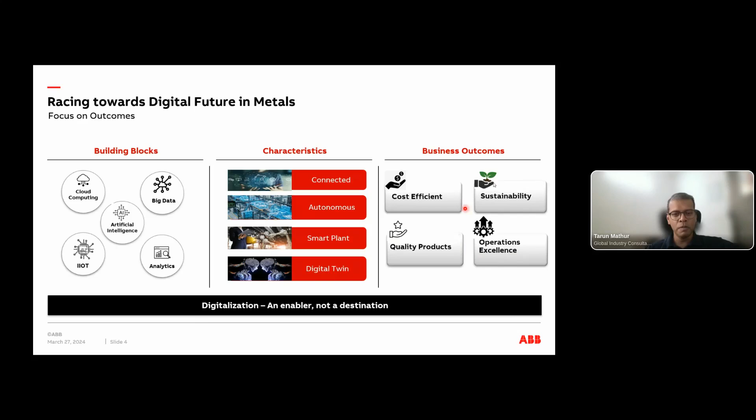In my experience, generally we lose sight, so let's keep our eyes on the prize, the business outcomes on the right side that you see. And with that note, let's look at the next problem: how?

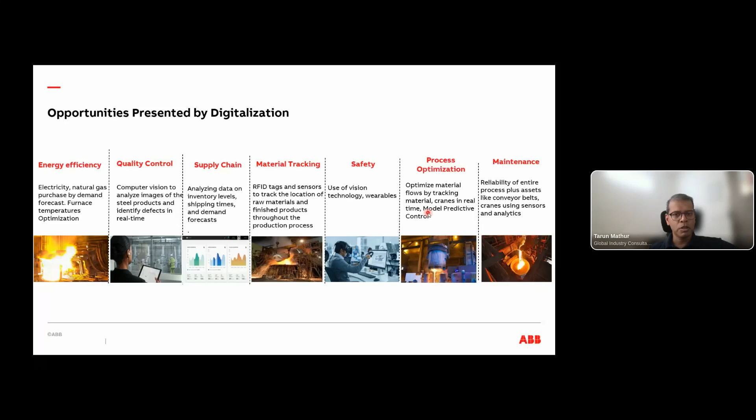Good. Then coming and drilling down to what ABB has to offer. So ABB, as you know, we work more closely to manufacturing, more on the manufacturing part of digital, more operations and maintenance related.

We divide our portfolio into 5 pillars. At the top is asset performance, centered around the asset itself, its performance, downtime, and how we can avoid or reduce it. Process performance and operations are quite similar, but process performance relates more to advanced process control, kind of level 2 on the automation layer, where we improve with the use of data and models. Operations excellence, on the other hand, sits in the traditional mindset of level 3, where MES, scheduling, and optimization algorithms sit.

Sustainability, no doubt, is one important opportunity to improve, and we have some solutions for that as well. And last but not least, connected workforce—it's an emerging portfolio for us. Here, instead of the process, the workforce or the operator is in focus. Typically this includes either the safety aspects of the people or reducing their workload, like by digitizing logbooks, digitizing maintenance workarounds, and so on.

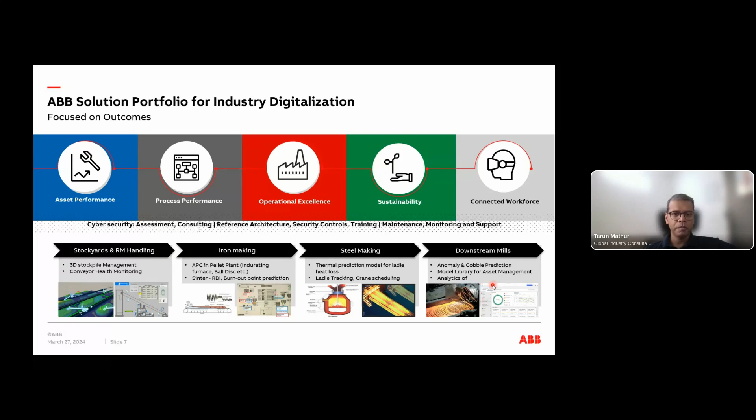So that was a short overview from me about the opportunities presented by digital, but digital is a large aspect, so everyone uses its own lens to visualize it. It would be good for us if you take this poll and share your views—what opportunities do you see in your day-to-day work for your organization or the plant you work at? It would be good to see whether it resonates with what I presented or not. Please go to slido.com, or use your phone camera to scan the QR code and put your input there.

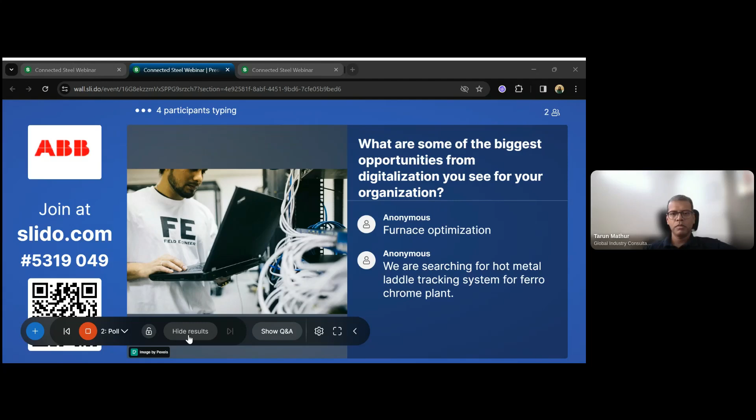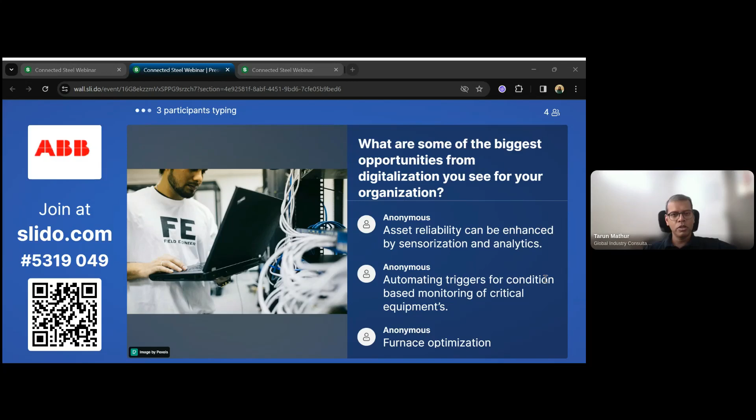Furnace optimization—I assume it's about reheat furnaces, which are also about energy usage. Then we have automatic triggers for condition-based monitoring from critical equipment—definitely, I think this is one of the most popular fields. Asset reliability, using sensorization. Hot metal temperature—yes, I think you nailed it. I think in ladle tracking and other projects, especially in the melt shop or upstream, temperature is key, right? Temperature and chemistry at each process, so if we can either monitor it directly or estimate it, that helps the operations.

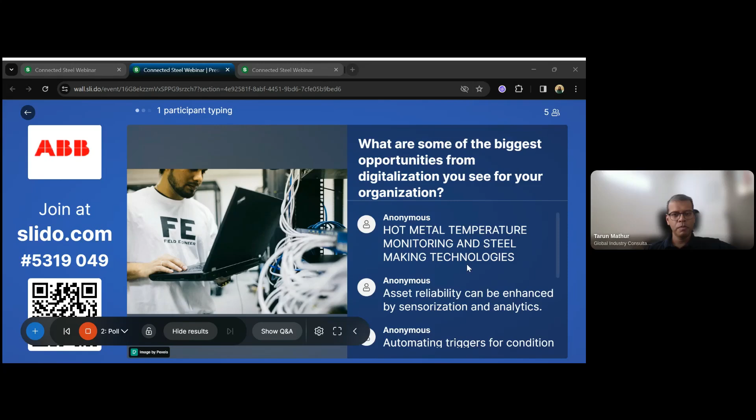Good, some nice comments. Maybe just a few more seconds, Shalaka, then we can shift back. Okay, good. Thanks for participating, I think it gives a view about the opportunities that you see. Good, then let me move to the next slide.

I will present one case study on advanced process control, or APC—some of you from an automation or control background might know it as model predictive control. It's one of the proven and established technologies to optimize complex processes, especially continuous processes. That's why we see only a few use cases in the metals industry, but this is a very mature technology in oil and gas, cement, and pulp and paper. It works by modeling the process behavior, predicting it, and using that model to provide closed-loop set point changes to the automation layer. That's very important to note—unlike many other digital solutions, this technology works in closed loop for improving efficiency and quality.

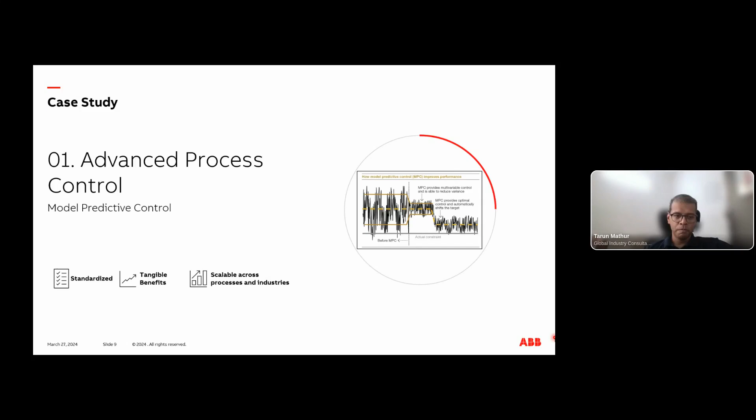So as I already said, it's a standard approach, and that's what makes it scalable. ABB has a standard platform, and you can fit any process on that. We have done that even for different industries, and even in metals. I would show you a lot of processes we have covered using the same platform, same framework.

So it is that powerful technique in control theory. It works on top of PID or automation layer, and the output of this is set point changes to PIDs. As I already mentioned, it works in closed loop control. I'm highlighting this because the benefits are tangible, since it does not rely on human intervention to upload or download the results to make the potential realize.

So in simple terms, it sits on top of automation. It has a data model at heart, so it's fair to say it has a mind of its own. It knows the process dynamics, which are modeled and kept at this layer. So you can call it a digital twin as well for control.

We have to configure whether we want to run it for maximizing the throughput or minimum energy - that we can do, and that's actually also very key. We can also define the constraints on your key operating variables so they don't go out of bounds. So it can run in closed loop without the fear of the process going unstable. It's that proven technology.

It's not so common in the metals industry, but you see some of the use cases we have mentioned on the left, and many of them we have already delivered. You will see some examples from me and also from our guest speaker as well. Let me show an example from a pellet plant, because you see a lot of opportunity there, and not just pellet, in a sinter plant as well.

So this is a typical pellet plant, and a few years back, we started by analyzing what are typical problems that can potentially be addressed by APC. We look for typical process variabilities - like ore grinding at the top in the beginning, so we have to control the variability in grinding quality.

Then there is a balling disc to make the green pellets, so we have to handle or remove or reduce the green pellet size variability, reducing rejects and increasing throughput. Then if you come to the pelletizing machine or indurating machine, it's about temperature variations which result in pellet quality variations, and also limit how much you can increase throughput.

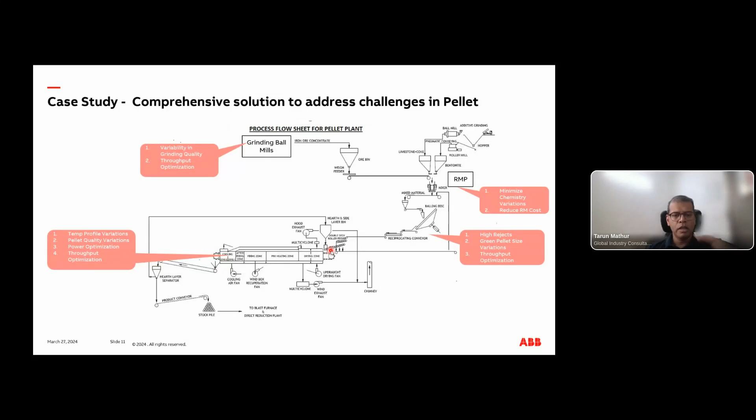So starting from grinding to indurating, we have deployed this, and many of them at JSW itself, which they will present. So I will not spend much time here, but I will just take you through a couple of use cases, how it is typically used or how it is typically developed.

So this is a grinding mill example, like a ball mill. Typically you have to look for measured signals and divide them into control variables that we want to control, that you see here in dark blue, or maybe we want to maximize. If we maximize throughput, we have to find a measured signal that signifies that - flow rate or speed - which signifies the throughput, and then we can put it into the maximization zone of the APC.

Then there are manipulated variables, meaning the variables whose set points can be changed to control. Let me make a point here - when it changes the set points, it doesn't make sudden changes. It always makes incremental changes to always be in control, right?

And then there can be other parameters like quality. There can be measured disturbances that we cannot control, but we can use them as feed forward, predictive variables. Once we identify it, in the framework of APC, we collect the data, make the model, and then in real time it predicts and optimizes and comes up with the right set points. So that's how it works, for the grinding mill, and in similar fashion.

Next one is very fascinating, very interesting example - that is for the balling disc, which feeds the green pellets to the indurating machine. Generally pellet size measurement is not continuous, there is no sensor there. And if there are undersized or oversized pellets, they are either rejected or recycled, and that is not good, because then the same material goes over, you increase your specific energy consumption, and it can also become the bottleneck for increasing the throughput.

Here the controlled variable is pellet size, and the manipulated variable is disk speed. There can be more, like tilt angle, water addition, but that depends on your control philosophy, whether you have them as measured and controllable or not. But in this case, we have one problem: we do not have the pellet size measurement.

Remember, everything has to be a measured signal. So if we don't have the pellet size measured, we resort to computer vision image analysis to detect the pellet size. If you have multiple balling discs, we have one camera for each disk measuring the pellet size continuously in real time. It gives the size distribution as an output to APC, which then changes the set point of, say, balling disk speed.

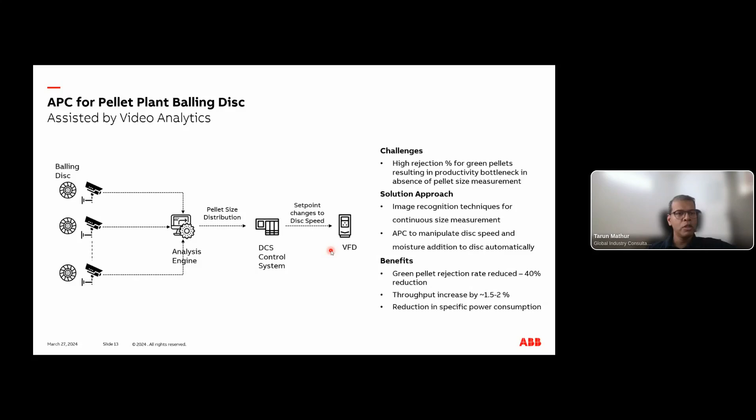This typically results in a lot of reduction in reject. And if the downstream process, the indurating machine, allows, you can also increase throughput. It also reduces the specific power consumption, because you're not recycling again and again the same material to produce the same throughput. So this is a very interesting project which we have done quite recently.

Then there's another project on the indurating furnace as well, with the same concept. Here the control variable is the temperature profile, the burn-through temperature, because it's very important to keep the temperature profile pellets are exposed to, so that quality is in check, like CCS, tumbling index. It can also be used to reduce the ID fan power you see at the bottom. The fan power consumption can also be optimized with this.

So, similar philosophy: we use manipulated variables like the fuel flow through the burners in different zones of the indurating machine, and the results we have seen are very promising. First it tries reducing the variation of the temperature profile and ensures that the burn-through temperature is achieved. That itself will help the pellets reach the right temperature, which improves quality.

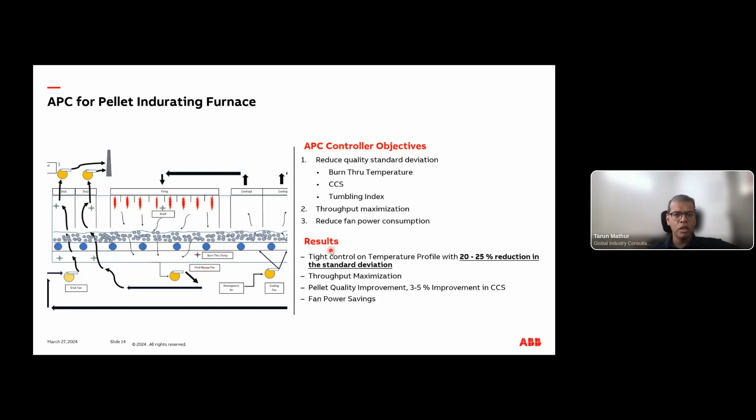So these are some of the examples, multiple examples. We have also implemented APC in the ore dryer, for example. So I would say this is one of the very promising technologies, and with the advent of this mathematical modeling, we can use advanced process control more and more in metals, not just in pellet plants. It can be in sinter plants, in your boilers if you have a captive power plant, and so on.

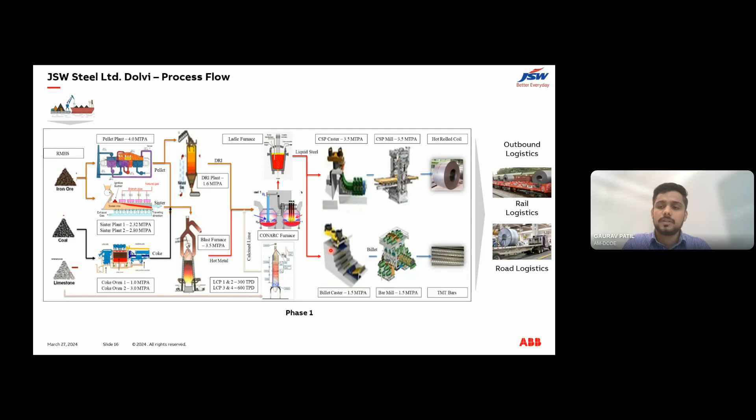In Dolvi, we incepted the digital transformation in 2017-18. The background behind this is that initially there was a lot of manual intervention in the processes, and there was a lot of scope for improvement as well as cost saving. In 2017, we started this digital transformation journey with the help of experts.

After that we continuously introduced new technologies in Dolvi and JSW, deploying it horizontally across the group. A major role in the digital transformation success of JSW is employee engagement. To ensure high employee engagement, we continuously conduct ideation workshops, participation in various competitions, different training programs, know-how sharing sessions, and interplant discussions with the Vijayanagar team and Salem team, as well as quizzes. There is also a platform for all employees where they can learn themselves - a self-learning platform called the digital central platform.

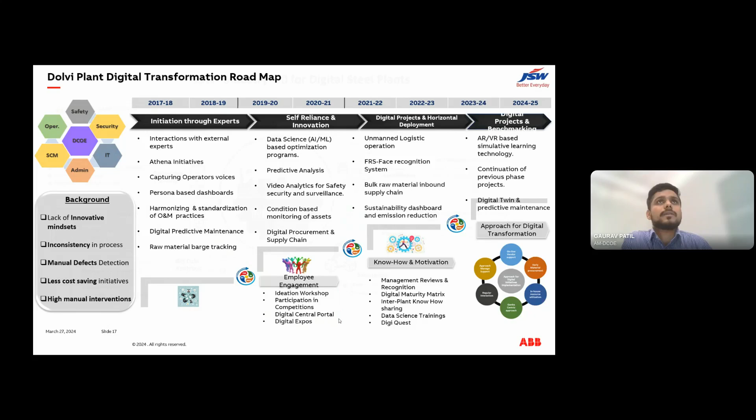In JSW, we focused on various technology domains including artificial intelligence, GPS, IoT, big data analytics, simulation, machine learning, process automation, and cloud computing. We have implemented different initiatives considering these technologies, and they have really helped in our digital transformation journey. I am going to present a few shining cases today which we have implemented in JSW.

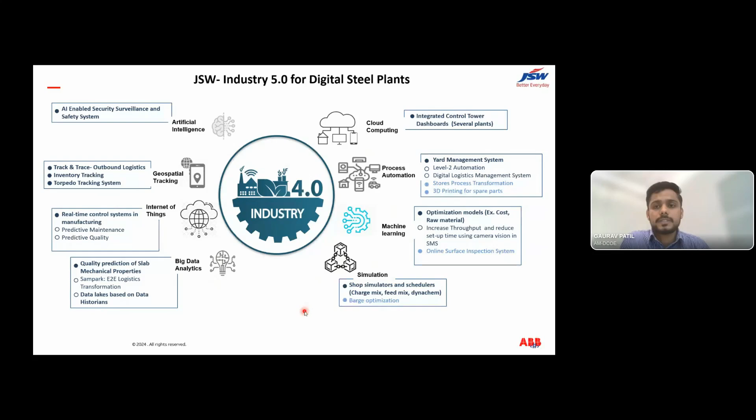So the first case, which Tarun has already mentioned, is APC for the balling discs. The problem statement for this initiative was that initially there was a high rejection rate in the pellet plant.

In the pellet plant, there is a balling disk which generates ball-sized pellets fed to the induration furnace. Before feeding it to the induration furnace, there is a screening for pellets between 8mm to 16mm, and we were getting a high rejection rate in the screening. So we implemented this initiative with the help of ABB in JSW Dolvi Pellet Plant 1, where we had a baseline of 19% rejection rate, and we took the target to reduce rejection to 10%.

This is the typical architecture for this APC - we installed cameras for each balling disc, and this video feed is fed to the Cerebra server. The server gives the real-time size distribution of the pellets, and according to this real-time data, we control the speed of the balling discs.

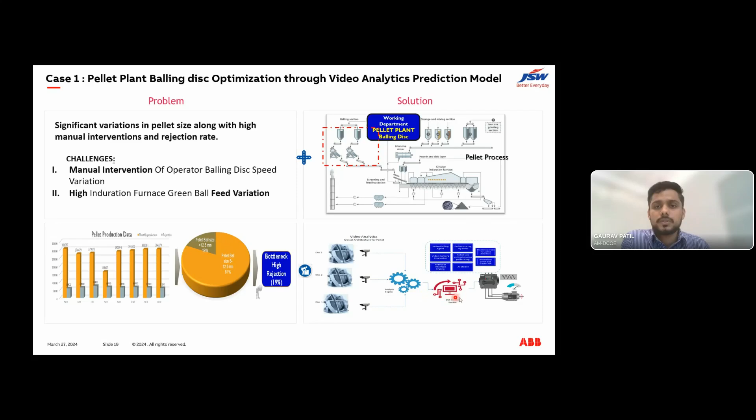This is the solution architecture I mentioned earlier - we installed cameras and this camera feed is fed to the server, which controls the balling disc speed via VFD. We are also controlling moisture, so that we get the desired size distribution of the pellets.

The results of this initiative were really incredible - we reduced the rejection rate from 19% to 6%, which is even lower than the target we initially considered. Due to this reduction in rejection rate, we also saw an increase in the production rate. This is the initiative we implemented with the help of ABB in Pellet Plant 1.

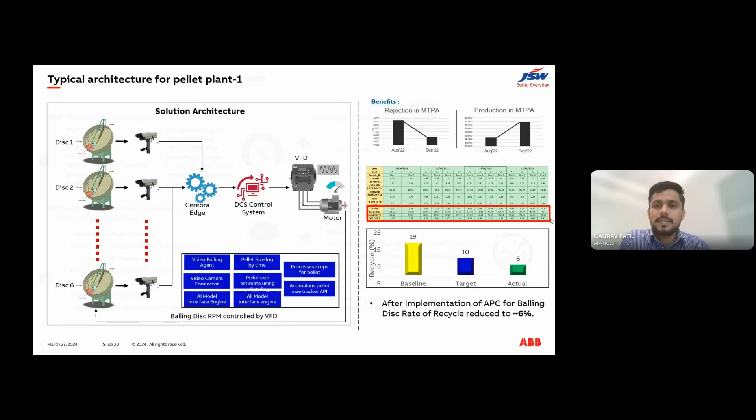The next shining case we implemented is in SMS1. The problem statement behind this initiative is that in the Con-arc shell there was a lot of manual decision making for operations, and there was no proper planning.

There was no proper planning for production, and no proper planning for hot metal mixing, due to less visibility of the torpedo and less visibility about the tap out, and there was no accounting for delays and breakdowns.

So we implemented this initiative so that we get an optimized plan for the next 2 hours. We get visibility of the torpedo - how much hot metal is on wheel, how much hot metal is in the blast furnace, and how much hot metal will be available for the next 2 hours. This allows us to optimize the 4 Con-arc shells and optimize production using this production plan.

Due to this, we got synchronized upstream and downstream production, resulting in increased liquid metal production. For this initiative, we are using geofencing to track the torpedo, data analytics, and linear programming to get data from different sources, optimize it, and get the optimized result for the next 2 hours.

What will be the best plan for the next 2 hours, so that we can get optimized use of this converter shell. We have also provided persona-based dashboards for the HODs, as well as the operator and blast furnace operator. So this is the basic overview of this initiative.

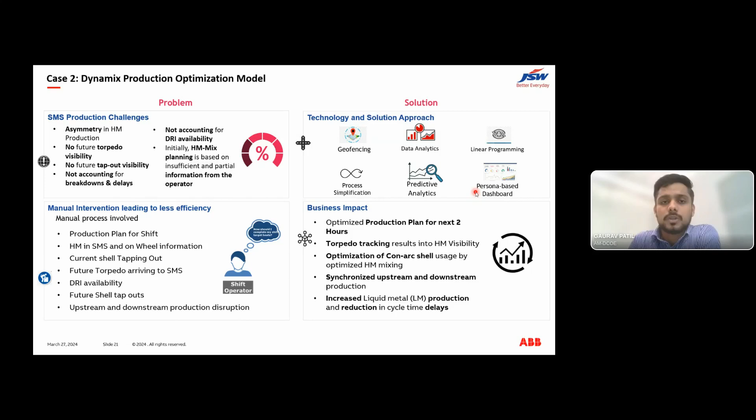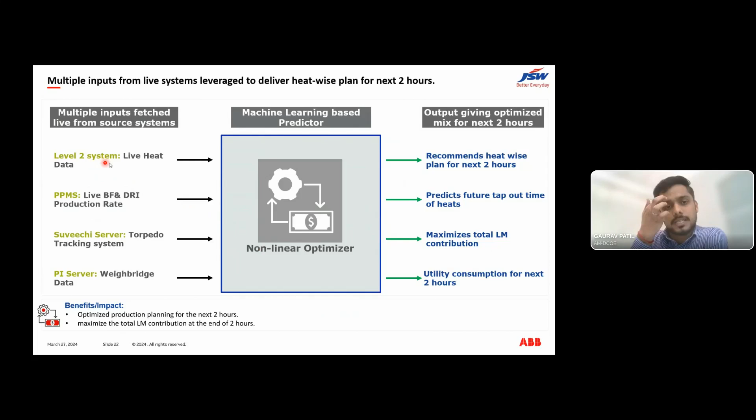For this initiative, we are getting live heat data from the level 2 system of SMS, as well as blast furnace production rate and DRI production rate. We get this from the PPMS system. We have implemented a separate system for torpedo tracking, which is a Suveechi server, and we get the weighment of the torpedo from the PI server.

This data is fed to the nonlinear optimizer, which gives us the next 2 hours plan for production, the next 2 hours plan for each converter shell, and the possible consumption of utilities for the next 2 hours.

It has a huge impact on production improvement in SMS1. It is really giving an optimized production plan, and it has resulted in maximizing liquid metal production.

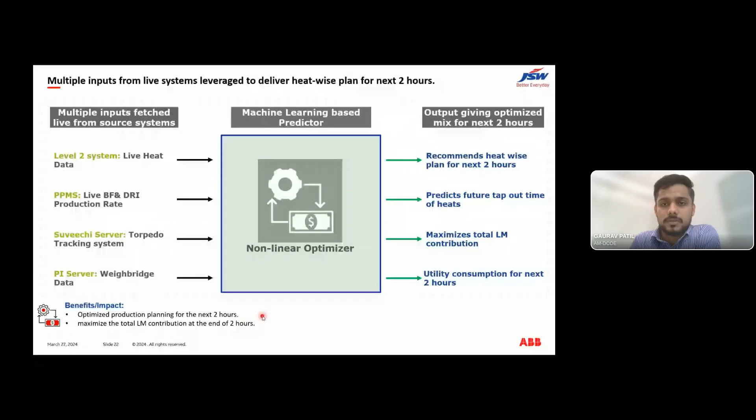The next shining case is setup time reduction using a vision system in SMS1. Initially, there was no visibility for micro-level activities during setup time, and no decision making was possible since no data was available, so we were losing data and missing the scope for improvement.

So we installed cameras to track all the micro activities, which analyze each activity, and we get a log for each activity showing how much time it consumes.

We created a system to get logs for delays in each activity. In case there is a continuous delay for a specific activity, it gets escalated to the HODs, who conduct brainstorming sessions and discussions with the operators about why the delay is occurring continuously.

Due to this, we are able to reduce the setup time. Initially we took a target of 12 minutes from the baseline of 14.6 minutes, and currently we are getting around 11.4 minutes setup time.

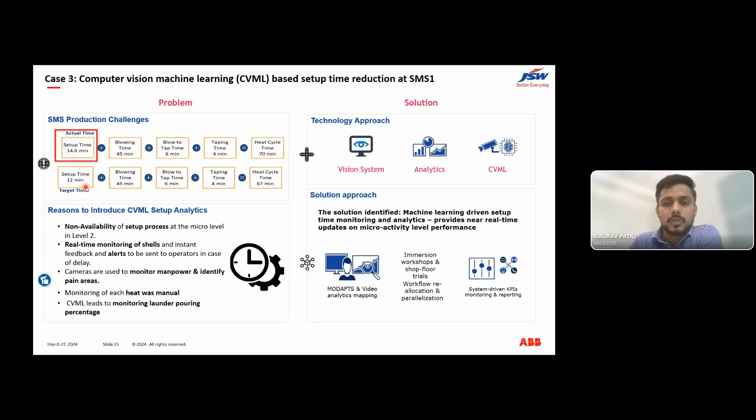In this initiative, we track micro-level activities during setup time: top lance positioning, hot metal pouring, end brick cleaning, launder insertion, furnace leveling, and hot metal positioning. These are the micro-level activities we track using a CVML system.

This has resulted in reducing the setup time to 11.4 minutes, and the total overall cycle time has been reduced from 70 minutes to 67 minutes. It has resulted in improvement in production in SMS1 as well.

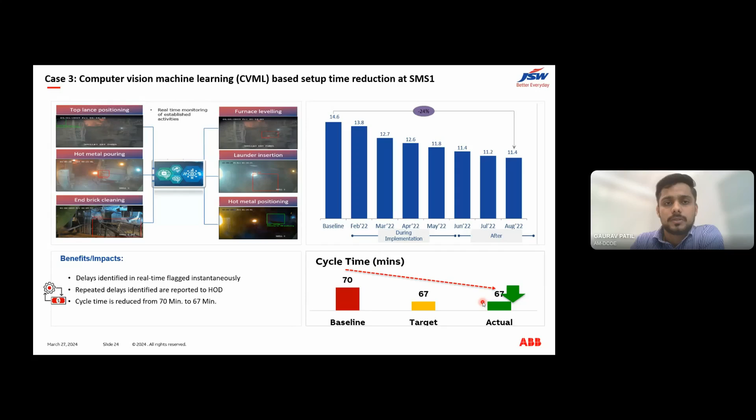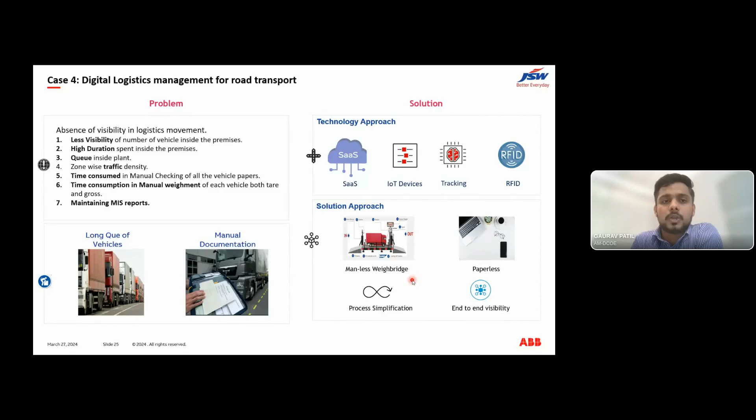In this initiative, we are tracking all inbound trucks, interplant movement of trucks, as well as outbound trucks. In outbound, currently we are live with the outbound operation in Sampark, and we are tracking coils, pig iron, and pellets, as well as billets and TMT bar outbound operation.

This project was divided into 4 modules. First one is a parking yard management system. Whenever a truck arrives in the JSW premises, tracking starts from the parking yard. Then we get the pre-intimation of the truck arrival in the parking yard, so that our planner, which is not a manual operation now but automatic, assigns the DO to this truck to carry the coil. Then the truck enters the plant, and all operations are tracked using this digital solution.

So the benefit we have achieved from this initiative is a high reduction in TAT, and there is no scope for error now. This is the initiative in logistics digitalization we have implemented.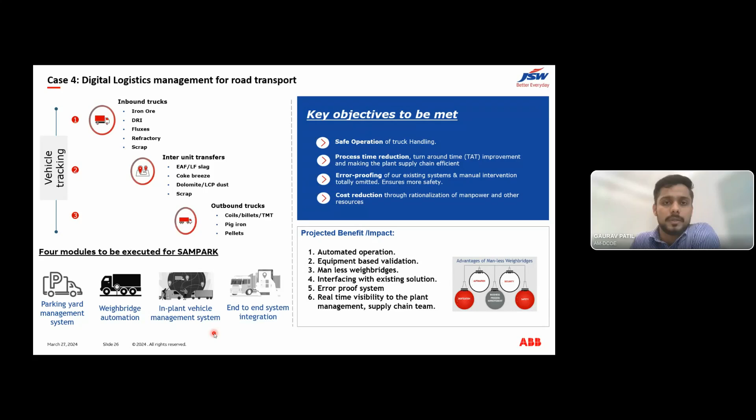In JSW, we prioritize safety, and there are a lot of digital initiatives we have implemented to improve safety in the plant. As Tarun has already mentioned, the connected workforce solution - we are also in the POC stage of connected workforce solution in Dolvi. Then there is a laser scanner for the LF ladle, a PPE violation detection system which is CVML based, and a flare stack thermal imaging system. These are the systems we have implemented to improve the safety of the workforce and safety at the workplace.

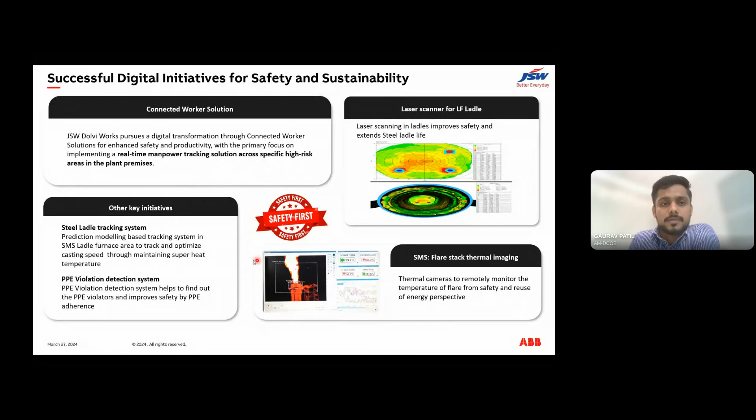Thank you, Gaurav. I think this is very interesting, and I'm sure it will motivate others, because what I've seen in the past working with JSW, you have a thriving ecosystem of innovation with suppliers like ABB and others. Some of the solutions are very unique, using different building blocks I was explaining earlier, like IoT sensors, analytics, and optimization techniques. It's always good to see you had a business target in mind when you started the initiatives, whether reduction of setup time or reduction of rejects. So these are shining examples of how digital technologies are utilized to achieve business outcomes. Thanks for sharing with us, Gaurav.

Thank you very much. So I will continue from here. I will give a few more use cases for our audience here.

Let me move to another project that ABB did for improving the efficiency of melt shops, steel making shops. In this slide, I've mentioned the typical challenges you would recognize.

Melt shops are characterized by a lot of movement - you would see a lot of material movement in ladles, crane movement, and lots of manual operations. So tracking of material along with the ladles is important to improve the overall efficiency of the steel making shop, because what is essential is to have the right temperatures and chemistry at the end of each process, so the melt shop can produce the right quality of steel with the highest production rate.

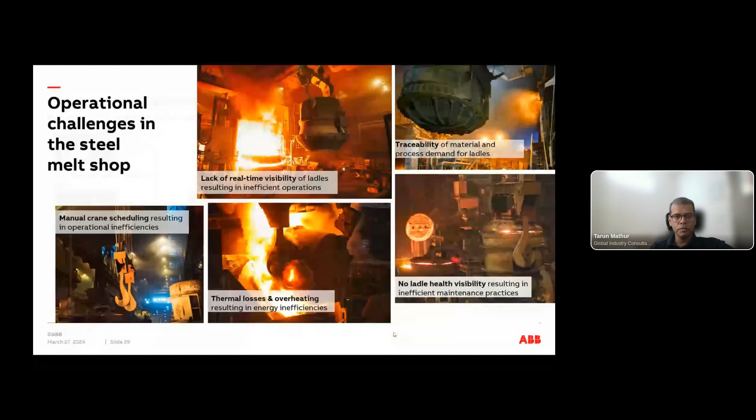In the next slide, I've tried to show the challenges seen in the last slide. On the left, due to lack of real-time visibility and insufficient or no thermal history, thermal loss prediction becomes very challenging. And why is that important?

Because there is a very important KPI measured by the operations team in a melt shop: superheat compliance. That's at the center here, which simply means how many percentage of heats reach the caster at the right average superheat temperature - for any grade of steel, that's its liquidus temperature plus say 17 to 20 degrees, at which the caster can produce at the highest productivity.

Because at higher temperatures one has to slow down the caster, and low temperatures might also get high chances of rejection of the entire heat or batch of material. So avoiding caster slowdowns and impact on melt shop productivity is one objective. It also impacts the energy input in the LF, because if operators are overheating earlier, that can be reduced.

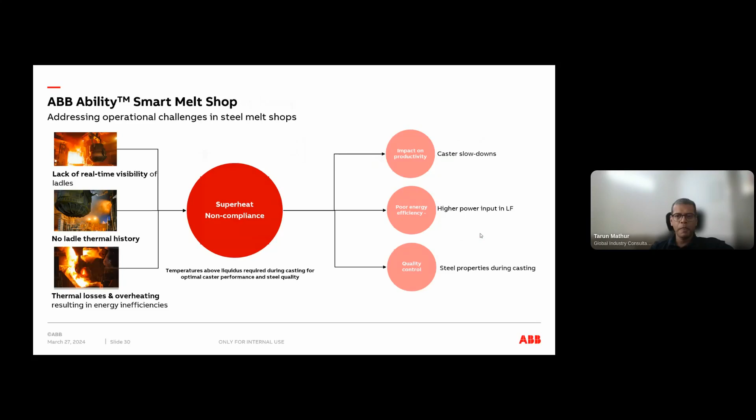We don't just have the thermal model. We have three different modules here. First is the ladle tracking - someone in the chat box was already asking about it. Ladle tracking is very important to have the complete ladle thermal history, and this is a very hardware driven solution.

We don't use RFID here. Of course we can use that, but it poses some challenges due to the high temperatures. So we use radar for crane positioning, and some other sensors, but the idea is to go beyond tracking and develop applications on top of it.

So after you get the tracking in place using any of these technologies, the other two are software applications - crane operations management, which is typically done when there are delays due to crane availability, like tapping ladle delays and so on.

But the most important one, which we see can give the most benefits, is the thermal model. This is a machine learning model to ensure superheat compliance, which I already explained is the percentage of heats reaching the right temperature. The output of the model is the lift temperature given to the LF operators, so that it reaches the right temperature at the caster. That's the objective of the thermal model.

That's the third module. And of course there are other modules, because since we are tracking every movement of the ladles, you can have time motion analysis, you can see where the bottlenecks are, you can do refractory management and so on. So it's a complete package, and that's what we call smart melt shop.

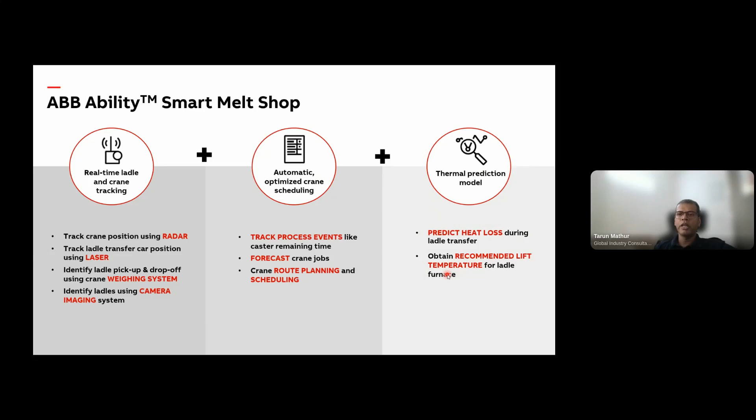I'll show some screens of how the output of the tracking module looks. You have a real-time view of your melt shop in your control room. As you see here on the screen, these yellow blocks represent the crane. They move, and you see this crane carrying ladle number 3, and you can click on any ladle to get information about that ladle or heat.

So it is like having information on your fingertips - real-time information you can see visually. Even without additional modules, I think it helps in coordinating and locating the right ladles and makes the job of, say, the ladleman and shift in-charge more efficient - to move the ladles as per the tapping needs or the caster needs.

The live tracking screens are adapted to the layout of wherever we are deploying it, and they are designed to scale. So whatever you see is as per the scale of the real shop that you have.

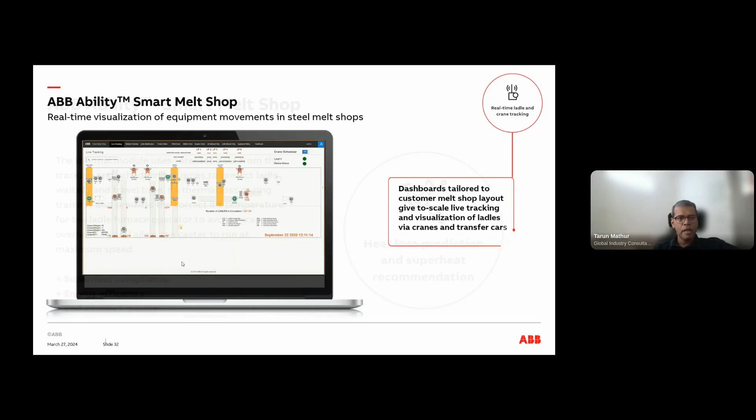But then, as I already mentioned, the real value is generated from superheat compliance or the thermal model, which is the most important module - which I recommend my customers go for at least as a first step. It considers ladle thermal history and forecasted events, based on the caster remaining time and the tapping event.

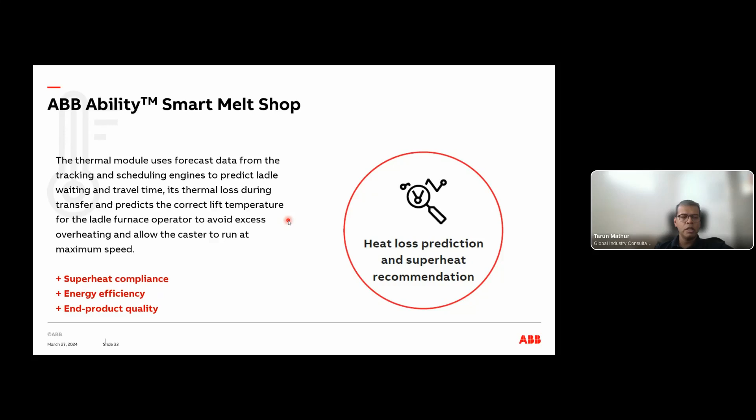We also forecast the events, so all this is taken into account in the machine learning, and it generates the output for the LF operator of what the lift temperature of the ladle should be. Typically melt shops would operate with say 60-70% superheat compliance, and with this model we can go up to 90%. Of course that depends on the quality of data, but yes, I think that is possible.

If you have a crane management system, you can also have reduction in tapping ladle delays. And what we have seen, as I was saying, around 5 degrees less arcing in the LF in case the operators were overheating it a little bit. So it has an impact on power consumption as well in LF.

And of course, as I said, it reduces the workload of ladlemen, shift in charge. So it reduces the footfalls and makes the shop more efficient and safe to operate. So that was about melt shop. I started with the APC, which is more upstream, then steel making shop.

Then let me finish off with some use cases on the rolling mills, downstream rolling mills. And there we have a good package of data analytics use cases. We have done a lot of projects with our data analytics package. They analyze tons of data. Some are high speed millisecond data to fine tune mill operations and make the product better.

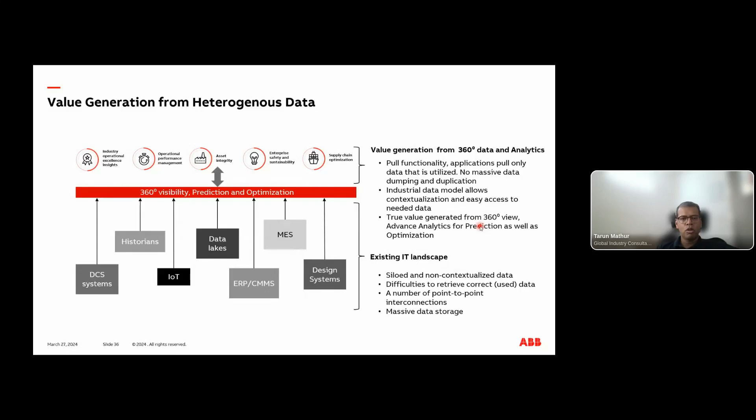So we have the framework which we apply across, which will enable us to collect data from different systems. The next step after acquiring data is to unlock value from it, bringing together data, domain, and technology. I put domain here because you need to have some understanding - if you talk about a coil, you might have to convert the data to length-based data to compare it, say, from one pass to another in a cold rolling mill, right?

So given ABB's experience in implementing even automation projects in this area and having the domain know-how, we have made specific analytics suites for different processes. We have some pre-built analyses like comparing lengthwise data of a coil, finding out thickness deviations, correlating it with process parameters, and so on and so forth for diagnosis. So I think that's what we bring with our know-how.

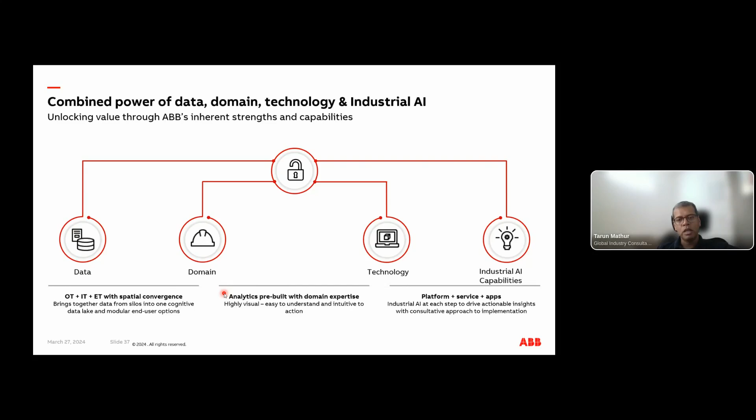So let me highlight some of the use cases that we hear from our customers. You see on the screen now. So process optimization is one big topic - by optimizing the rolling parameters, the mill can run at the highest efficiency or speed. And at the same time, we see the need to track the production cost associated with the finished product.

Some of the manufacturers term it as a digital coil, which has all the information embedded with it. And if you have the code, you can get all the information about the coil, right? And about the quality, about the other consumptions like energy, utility, and in the end, you can have the cost per ton.

But most importantly, all these analytics should allow us to see performance trends over a period of time, say months altogether, so as to diagnose if there is any consistent deterioration, and if that can be treated. And typically, when you look at the rolling mills, you have very fast, high-speed data, and it is difficult to derive long-term trends. So you have to compare the same product, same campaign from when you ran it last time - what was the performance? It's difficult to derive that starting with millisecond kind of data.

So that's why we embed that in an analytics package, which converts that data into meaningful performance scores that we do.

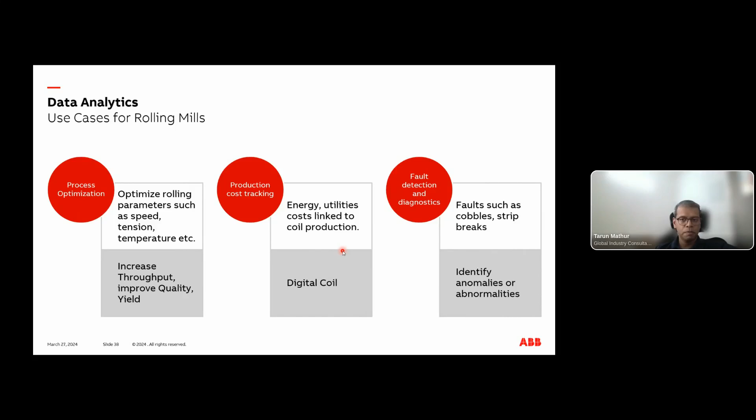So this is one of the case studies where we analyzed a 20-high cold rolling mill for a few days of data, and it already gave some interesting findings about long coil preparation times, inconsistent reversing times. It can automatically tell you between the passes. Now, there might be reasons for this, and that is the next step of diagnosis by correlating it with input material or other equipment issues.

So for this data, we found there were correlations between thinner material and poorer thickness quality, an important observation, and the system recommends tuning the AGC control for treating this. Like this, we can feed days or even months of data to the tool and come up with recommendations. So we can also run it in real time. You can see the real-time, continuous performance of the mill with this.

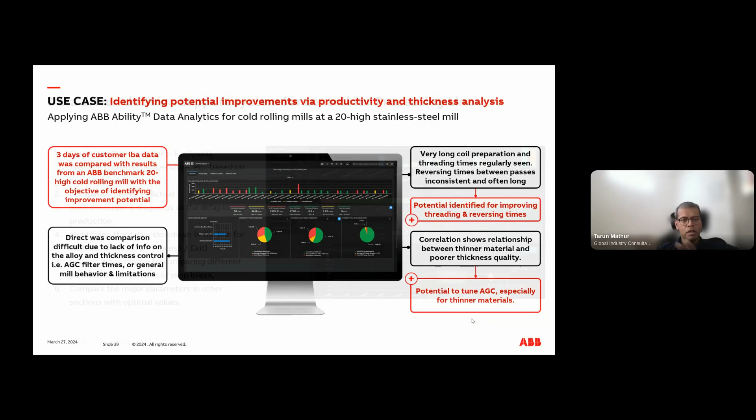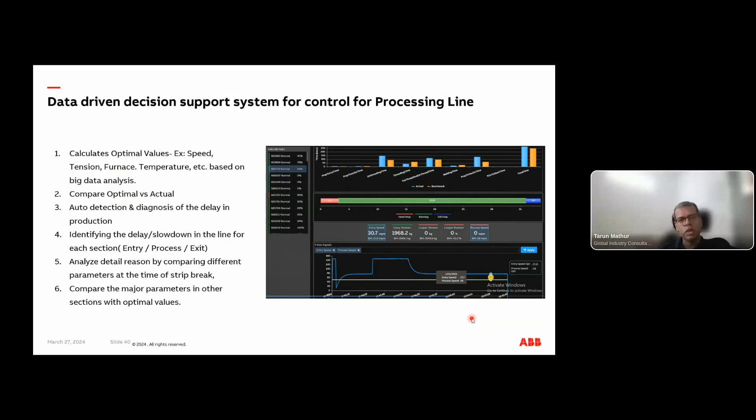A similar package is available for processing lines as well. I'm not going in too much detail, but essentially it can benchmark the performance with months of data that you feed, and then it gives a score for the currently rolled coils. And then we can use analytics to find correlations and what is different from the golden period of a golden coil to the current rolled coil. So that is the basic premise on which analytics is run, comparing performance over time windows.

The next use case is a pretty interesting one for a wire rod mill with a specific problem statement. It is for anomaly detection in the torque profiles of rolling stands. You can see here some abnormal signatures as in the picture, which can result in turned over bars and result in ovality or shape issues. If someone is continuously looking at the high speed data, of course you can find it manually. But if you have to automate it and inform it as soon as it is detected, so it can be treated. It's difficult to have someone looking at it continuously, so it can easily be missed.

But it is easier said than done, because if you have to do it automatically, there are a lot of fluctuations in the torque profile. Not all of them are associated with this problem. They can be because of temperature, speed corrections coming from automation, and so on. So we have to train this machine learning algorithm to look for the specific signature and avoid the others. Otherwise, it will result in a lot of false alarms, which is actually one of the very common problems or challenges we encounter in data analysis. There are algorithms which work, but if we give false alarms, then people stop using them. So I think we have to be very aware of that.

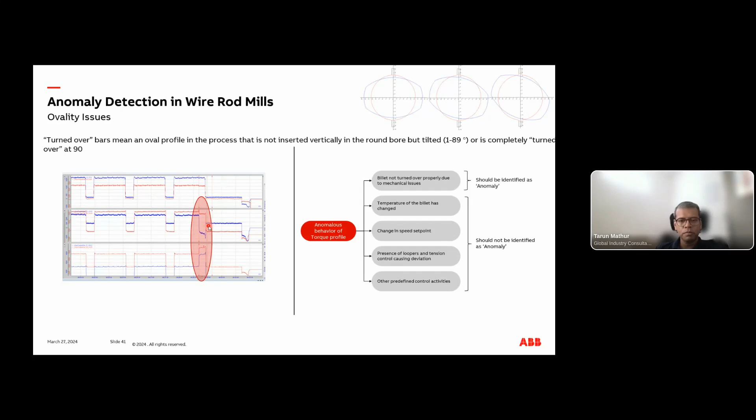Good. So with that, I conclude my presentation. I hope that some of the use cases I have shared resonate with your challenges or better opportunities in your mills or plants. It will be great if you can share which of the case studies presented today suits your requirements the best. For that, again, please go to slido.com or just use your camera to scan this. And let's see what responses we have. Shalaka, maybe you can show the Slido to the audience.

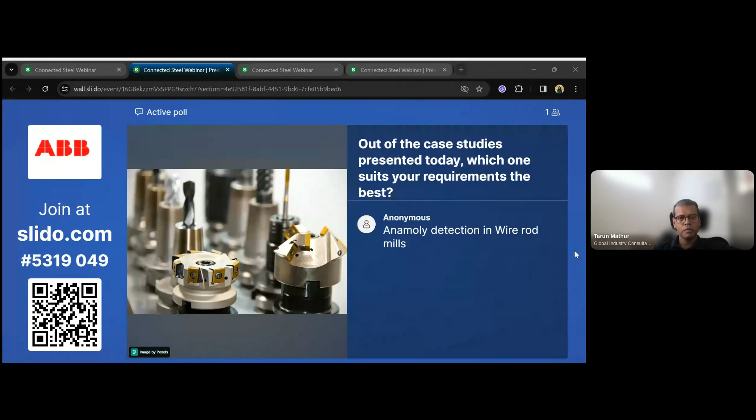I see, Gaurav, what you presented, the dynamics optimization model, is also of interest. Data tracking, yes, definitely.